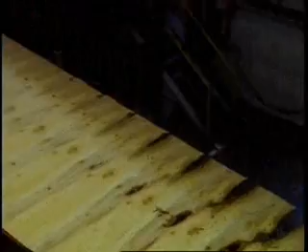Trus Joist's Colbert plant sprawls across the picturesque hills of northern Georgia. Nicknamed Tree City USA, Colbert is well known for its lumber industry. The Colbert plant ships its award-winning lumber products throughout the United States and overseas as far as Europe, Australia, and Japan.

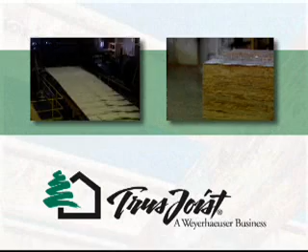Headquartered in Boise, Idaho, Trus Joist is a Weyerhaeuser business and the world's leading provider of engineered lumber products. Trus Joist operates 19 manufacturing facilities in the U.S., Canada, and Australia, producing a variety of products for structural framing and industrial applications.

These products, which include beams, headers, joists, and columns, offer strength and stability for a wide range of construction purposes. The Colbert plant manufactures Parallam Parallel Strand Lumber, or PSL, an advanced composite wood fiber technology that creates beams of exceptional strength and beauty. Parallam delivers all the construction benefits of traditional wood and will carry up to 10 times more load per section.

As many as 2,500 8-foot blocks can be created in a typical 12-hour shift.

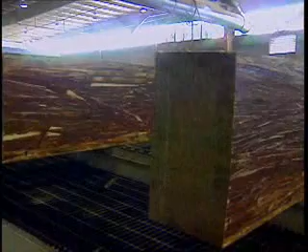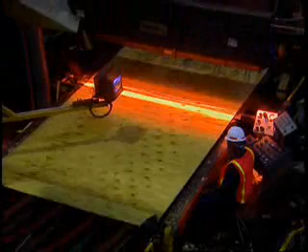When I first came here about 3 years ago, I recognized that we had an older system, an older platform for plant intelligence to work from. We did not have the ability to manipulate or improve processes with that platform. So we decided to make some changes with plant intelligence in order to get a newer system to improve our process with.

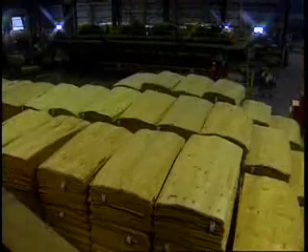The Trus Joist Colbert plant turned to In-Source Software Solutions to help improve their operations and product quality. In-Source Software Solutions worked with Trus Joist, which is a pure make-to-order operation, to adopt a manufacturing plant intelligence system from Wonderware, a business unit of Invensys.

The engineering support and the level of service that we got during that project was one of the things that allowed us to do it, period.

Industrial Application Server, which is based on ArchestrA technology and an underlying framework of Microsoft .NET, forms the foundation of Trus Joist Colbert's new plant intelligence solution. Industrial Application Server is unique in that it delivers the ability to address the needs for standardization, rapid and flexible deployment, change management, and application integration. By doing so, it extends the life of legacy systems and preserves previous investments in hardware, software, and intellectual property.

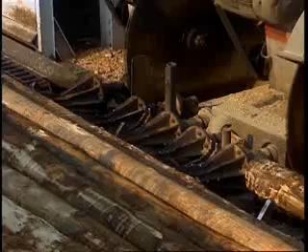We use a lot of Wonderware products in the company, and in fact it's pretty close to a standard as you can get. The ArchestrA technology was a step above that, and so it wasn't as industrially hardened as some of the other Wonderware applications. So it was maybe viewed as a bold step.

We felt we needed a bold step. We felt we needed to make a change, and we felt we could benefit from it, and we felt that the return on that investment would be more than enough to offset any downside.

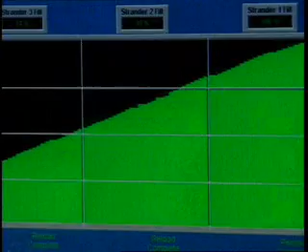Industrial Application Server is designed to optimize the integration of disparate solutions, develop and maintain standards, and in the process, it can cut engineering costs by as much as 50% while improving efficiency and performance throughout the plant.

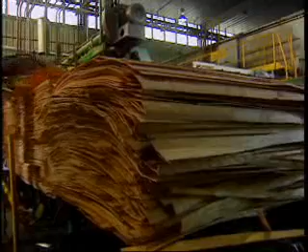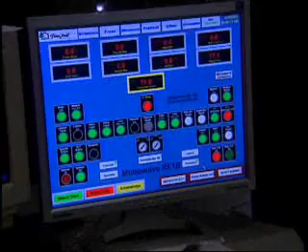And it's actually easier software. I worked with other software, other manufacturers, and I think from a drivers and communication standpoint and installation, Wonderware is really much easier.

Trus Joist engineers use it to build and configure objects for the HMI elements and push historical information to Industrial SQL Server. Industrial Application Server streamlined their application writing by approximately 60%.

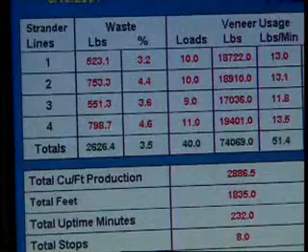In the future, it will provide a communications tool between Colbert and other Trus Joist plants, and further down the road to other Weyerhaeuser facilities, enabling projects to be shared between plants.

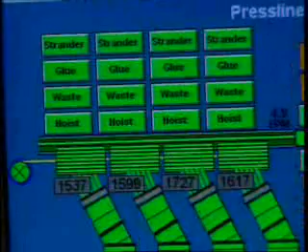At the heart of this evolution are Wonderware's industry-leading plant intelligence software solutions, including Active Factory, Industrial SQL Server, Downtime Analyst, and Industrial Application Server.

This plant intelligence system gives us the platform to stand back and add more HMIs without having to recreate the system. We can just keep adding on to it. It gives us the ability to add on to it with the HMIs.

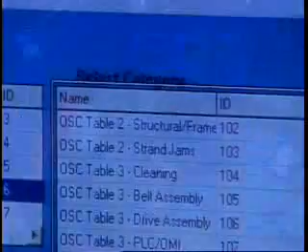It gives us the ability to add on tags for the historian. It gives us the ability to do more downtime tracking. It gives us the ability to incorporate all of Wonderware's modules with very, very little effort.

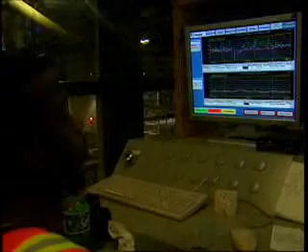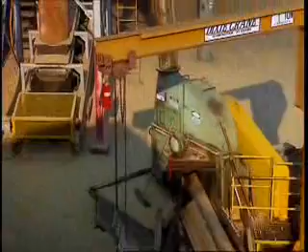Central to Trus Joist's plant intelligence solution is Industrial SQL Server Historian, which gives the Colbert plant's decision makers unprecedented real-time access to accurate, detailed plant information. The Colbert operation stores data from all areas of the plant, including shift reporting information and environmental data, and uses it to make critical business decisions on a daily basis.

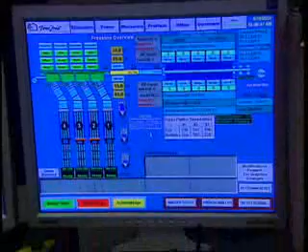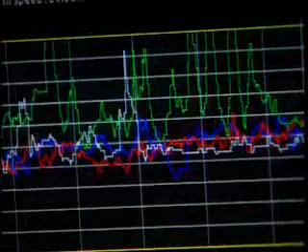Wonderware's InTouch HMI software helps staff visualize this information and use it to more effectively control the plant's industrial processes. Active Factory software analyzes the real-time and historical data captured and stored by the Industrial SQL Server Historian. Downtime Analyst tracks equipment performance to improve efficiency and product quality, keeping Trus Joist at the forefront of its industry.

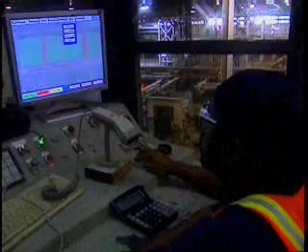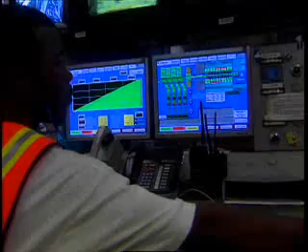This system right now at Trus Joist is being used by everyone. It's being used by the operators, the managers, the quality people, the maintenance department. Everyone uses it for one reason or another, mainly to get data.

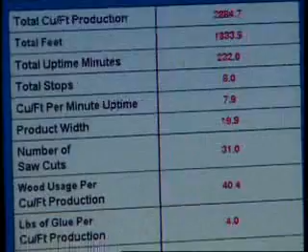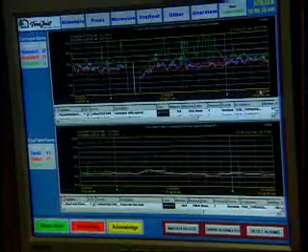On the management side, we're looking at trends, we're looking at downtimes through the DT Analyst. We have Active Factory Web that we have implemented so that we can push our data on up through to the corporate network. They can view live trends and see what the process is doing at any given point in time.

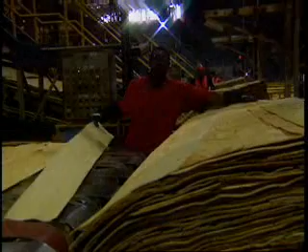Trus Joist has experienced a number of benefits from their new plant intelligence system. One of the most significant impacts has come from Downtime Analyst. After being up and running for only three months, DT Analyst delivered a surprise to plant personnel.

When we first put in DT Analyst, we looked at one area of the plant, and the downtime that we were assuming that we were getting was about 20% of what we were actually getting. And that caught everybody off guard, caught everybody by surprise.

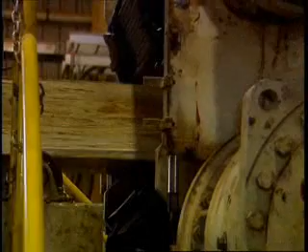In the initial rollout, Downtime Analyst was deployed at the press area, the plant's biggest trouble spot. It has had a significant impact on plant operations by ensuring data integrity and delivering accurate information in real time.

DT Analyst showed a lot of areas where we were slowing down and did not realize that we were, and it gives us the reasons why we were slowing down.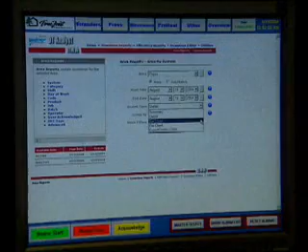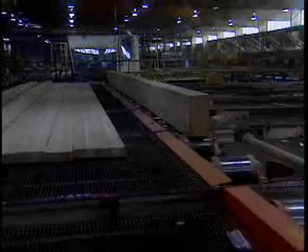By having DT Analyst and being able to track this data, trend it, and understand when it's happening and why it's happening, has allowed us to see a net gain of about 15% in our performance rate, which is the amount of on-grade product that we make per hour. That 15% is very important to our customers, as it helps us maintain the ability to deliver our product on time.

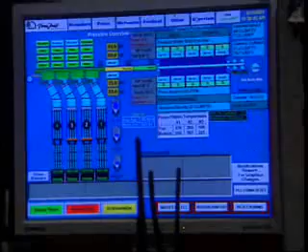Additionally, Wonderware tools have revolutionized the environmental reporting required of Truss Joist, improving accuracy and efficiency. Previously, reports were a highly manual process and very time-consuming. Reports had to be constantly double-checked for accuracy to avoid timestamp inconsistencies.

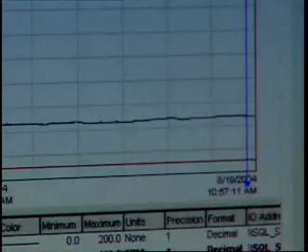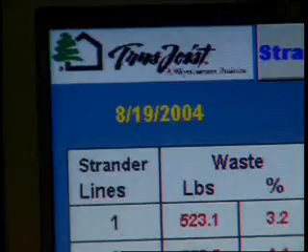Now the reports are generated through Industrial SQL Server and created using Active Factory Web tools. All the required data can be pulled up and sent off with only a few minutes' work. Moreover, problems are now being caught before they fall out of regulatory compliance, keeping Truss Joist from paying fines or penalties.

Wonderware's plant intelligence solution has had a profound impact on our reporting for our EPA. It has reduced the costs associated with excursions by giving us early data so that we can make changes before they become major problems.

The new plant intelligence system has enabled Truss Joist managers and operators to analyze process data more easily than ever, and better changes are readily integrated into the system.

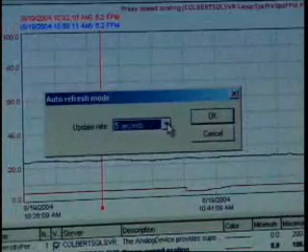We use real-time information from the system to see things here that this plant's never seen. This plant is about 15 years old, and before today, before Wonderware, we didn't have a good system to be able to see real-time data.

We use real-time data to make correlations in the process in order to bring them to light, so to speak, so we can take action to remediate. We've never been able to do that in this plant before.

The next steps in the evolution of the Truss Joist Colbert plant will see Downtime Analyst spread throughout the plant, delivering the same kind of efficiency improvements the press area has already experienced.

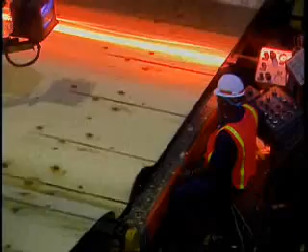Then, the managers at Colbert would like to extend the benefits they have experienced with Industrial Application Server and all of Wonderware's plant intelligence solutions beyond the four walls of their plant.

I would recommend Wonderware products, Industrial Application Server, the InSQL, all of the Wonderware tools with the highest regards. It has helped me not only here at this mill, but at other areas through my career.

Just as construction professionals turn to Truss Joist and Weyerhaeuser for stable, industry-leading construction materials, Truss Joist has built its industrial automation foundation with Wonderware.